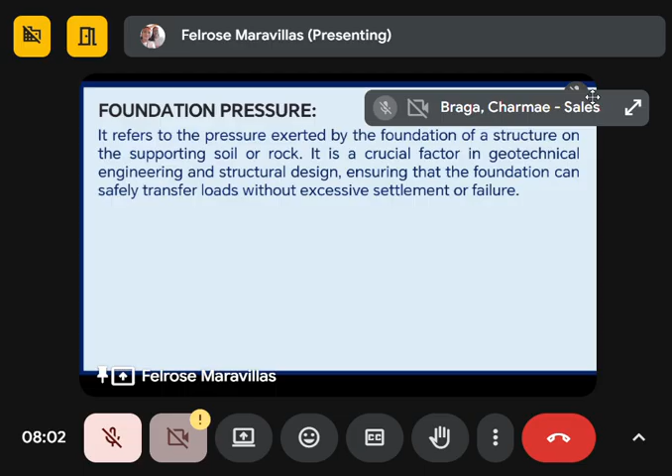This is very important in our design, because once the structure settles, it leads to failure - we see that the serviceability of the building is no longer there. That's a huge crucial problem. So it's very important that our structure can withstand and the soil can support our structure, from substructure to superstructure. The substructure is our foundation, and the superstructure is the main part of our building.

Again, the pressure, as mentioned earlier, is simply P or force over area - a basic principle. The unit of pressure is either Pascal or kilopascal. Pascal is simply Newton per square meter, kilopascal is kilonewton per square meter. What about PSF, what is PSF? Pounds per square foot.

That means, as Fuentes said - wait, that's a violation, you have to state your name first then answer, every time I ask a question.

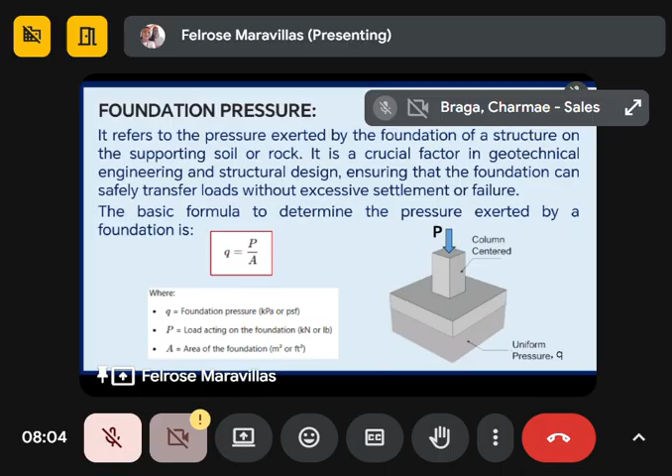Okay, so in our NSCP, we use the bearing capacity theories of Terzaghi or Meyerhof. Now we have the NSCP, which is the basis for most of our...

standards in our design. So in Section 304, if you read NSCP 2015, there is what we call allowable foundation and lateral pressures. Here it says that from the geotechnical site investigation and assessment, you will see all these descriptions.

You have to assess, in the geotechnical site investigation and assessment, the description of regional geologic characteristics, characterization of in situ geotechnical conditions, factual reports on the in situ condition, laboratory tests, factor of safety computation, and of course the evaluation of existing potential geologic hazards - that's part of the consideration.

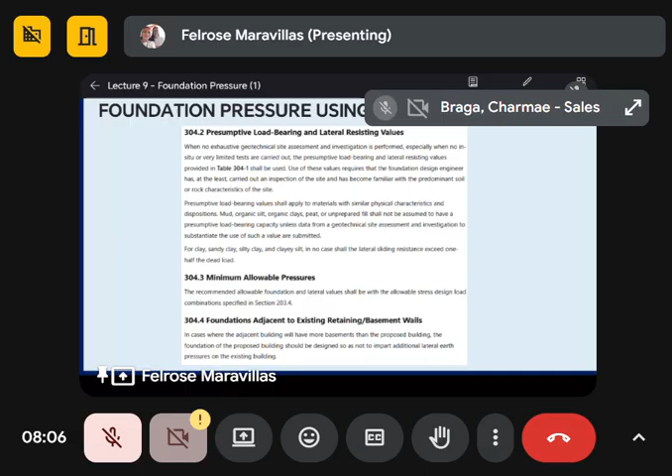It must be noted that even for experts, sometimes the data for soil exploration is not enough. So the NSCP has this recommendation, but basically you have to have the soil classification determined, and then you can have this allowable foundation pressure - this relates to our bearing capacity.

The bearing capacity - whether it's sandstone, lightly weathered, sandy and gravel - these are the allowable foundation pressures, the pressure that can be placed on the soil, allowable, minimum allowable pressure, maximum - this should be what we place here: 75 and 50 kPa, this is in kPa.

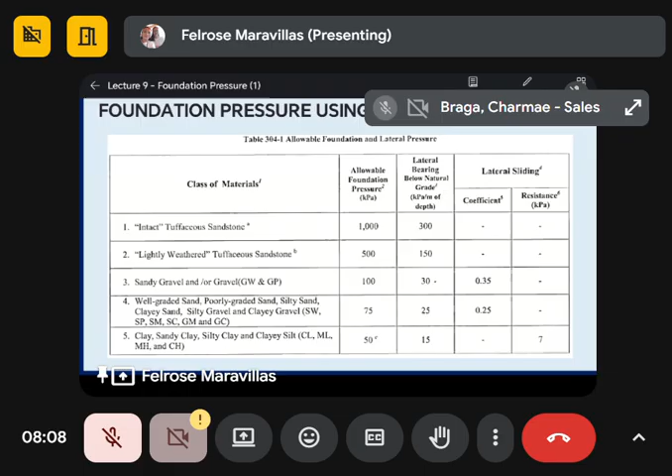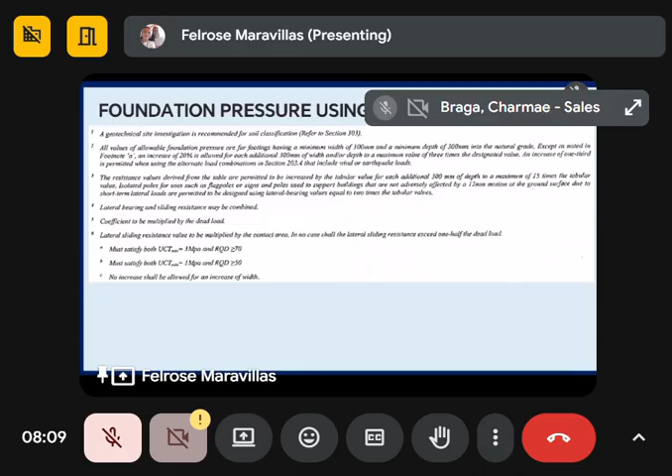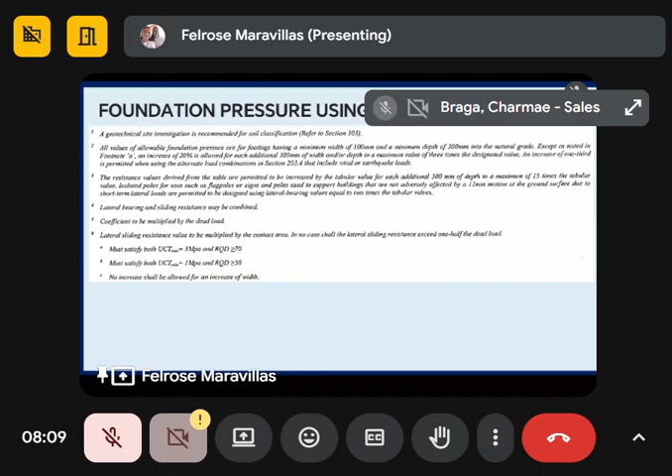For lateral bearing below the ground, there are accompanying values. Then if lateral sliding is considered, it depends - just like sandy soil and well-graded sand or poorly graded sand, you have 0.35 and 0.25. Take note, class, that this coefficient for resistance against lateral sliding must always satisfy the unconfined compression test or UCT, which must have a minimum value of 3 MPa - the smallest value - followed by the required rock quality designation, or RQD.